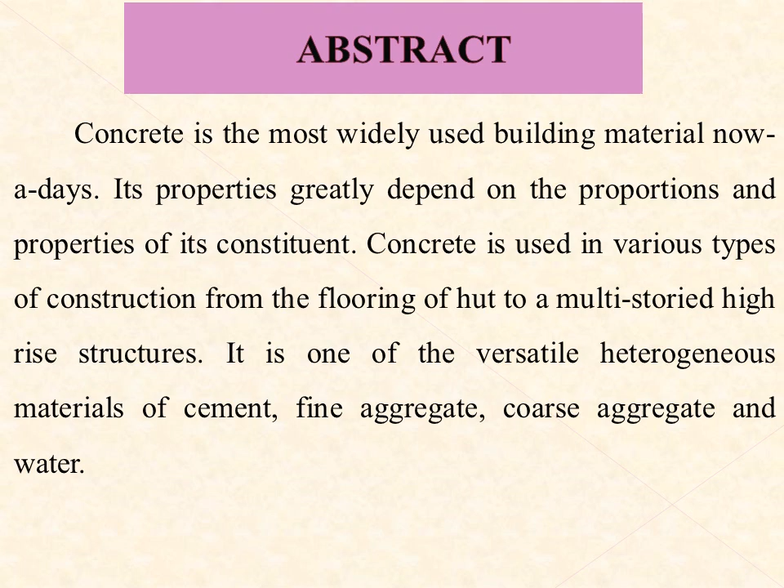Concrete is the most widely used building material nowadays. Its properties greatly depend on the proportions and properties of its constituents. Concrete is used in various types of construction, from the flooring of huts to multi-story high-rise structures. It is one of the versatile heterogeneous materials made of cement, fine aggregate, and coarse aggregate.

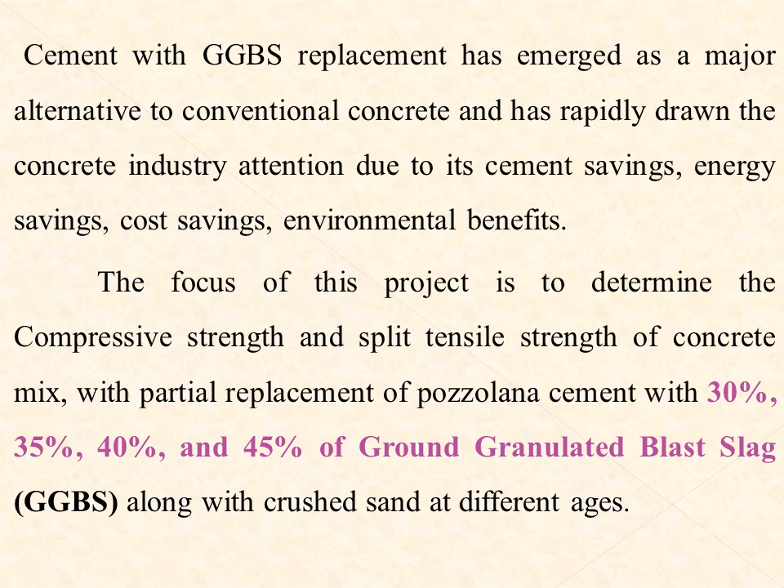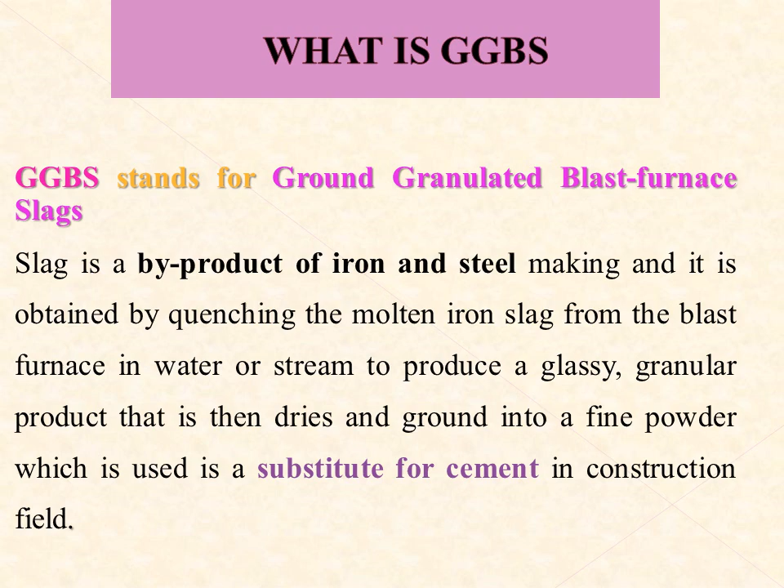The focus of the project is to determine the compressive strength and split tensile strength of concrete mix with partial replacement of cement with 30, 35, 40, 45% of GGBS along with crushed sand. GGBS is nothing but ground granulated blast furnace slag, a byproduct of iron and steel, used as a substitute for cement. The objective is to conduct property tests on coarse aggregate and fine aggregate, to carry out compressive and split tensile strength tests on various mixed proportions of concrete, and to compare the results of different mixed proportions.

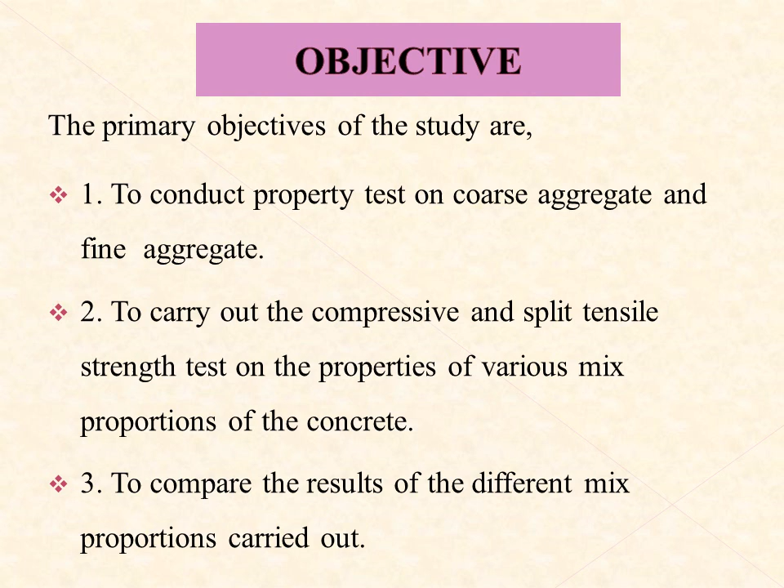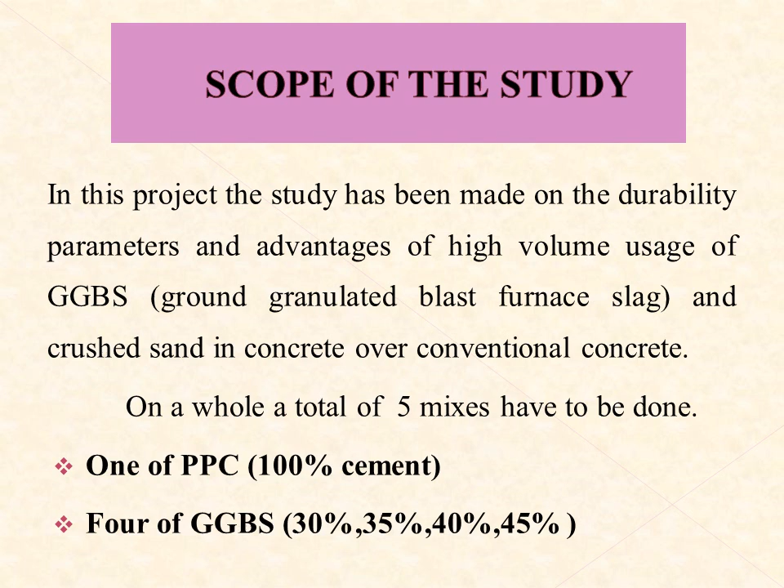The scope of the study has been made on the durability parameters and also the advantages of high volume mix of GGBS and its effect on concrete. As a whole, 5 mixes have been made: one of PPC 100% cement, and the other 4 of GGBS at 30, 35, 40, 45%.

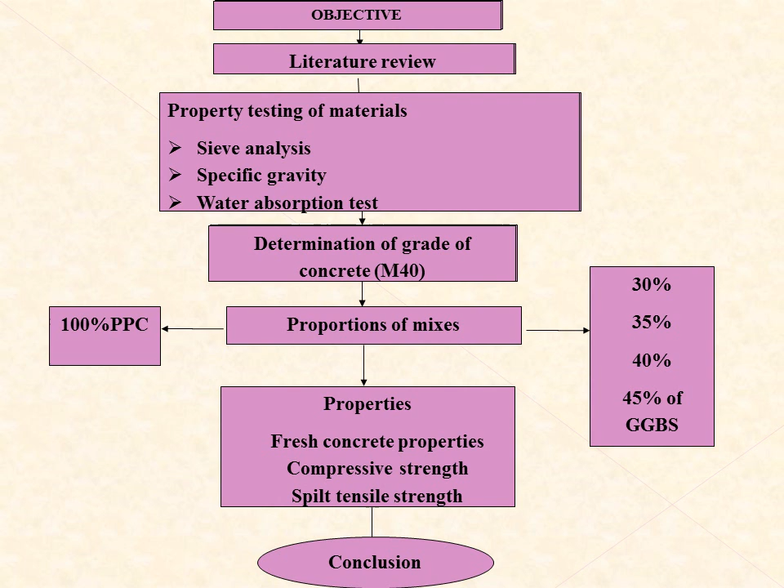Methodology: first objective, literature review, property testing, determination of grade. We determined the grade for M40 and proportions of mixes of 100% PPC, and 30, 35, 40, 45% GGBS, which underwent property testing, followed by conclusion and literature reviews.

The first paper was by Alvin Harrison. He observed that the addition of fly ash in PPC concrete causes slow hydration, and that phenomenon decreases the strength of the concrete mix at early age. Up to 30% fly ash shows a remarkable increase in strength compared to controlled concrete, whereas beyond that, the strength gets reduced.

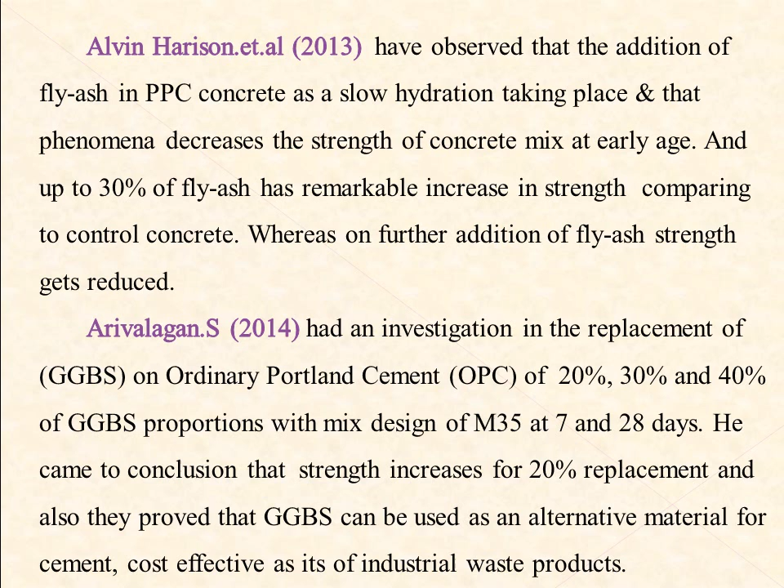Arivalagan's case study of 2014 investigated the replacement of ordinary cement with 20, 30, 40% GGBS proportions in mixes of M35 at 7 and 28 days. He concluded that strength increases for 20% replacement, and also proved that GGBS can be used as an alternative material for cement, being cost effective for the industry.

Pratap KV observed the triple blending of ordinary Portland cement concrete with fly ash and ground granulated blast furnace slag. Tests were carried out and showed improvement with the addition of fly ash and GGBS as a partial replacement to cement. The compressive strength and flexural strength of concrete increased by 11.13% and 11.74% respectively.

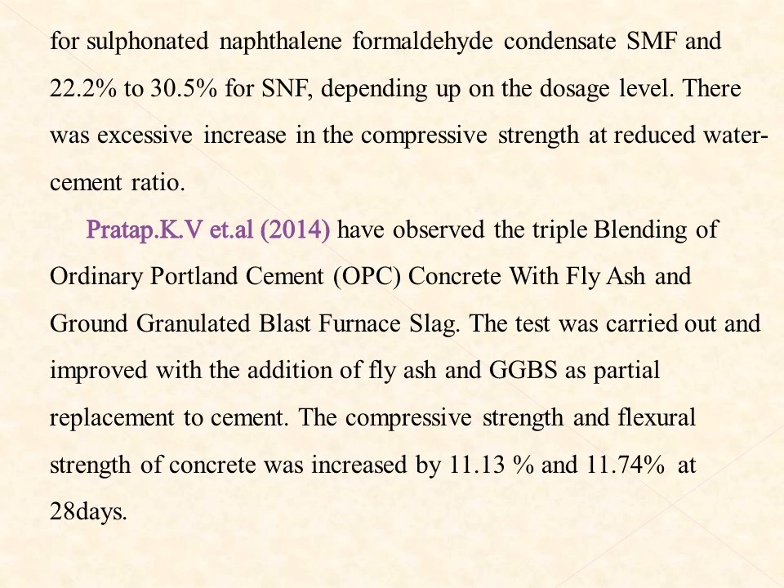Radhikesh concluded that the replacement of fine aggregate by crusher dust up to 50% by weight has a negligible effect on the reduction of physical and mechanical properties. He also concluded that 56% of money can be saved if sand is replaced by crusher dust.

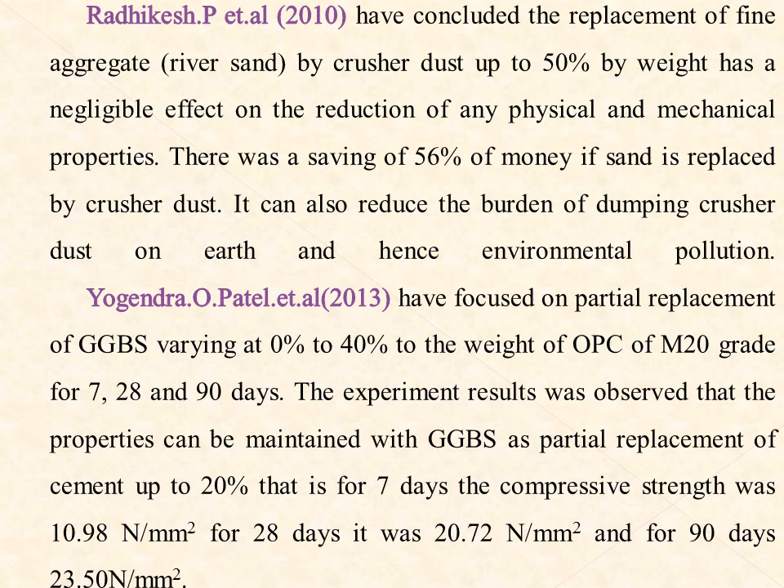Yogendra O. Patel focused on partial replacement of GGBS varying 0 to 40% of the weight of OPC, for M20 grade, tested at 7, 28 and 90 days.

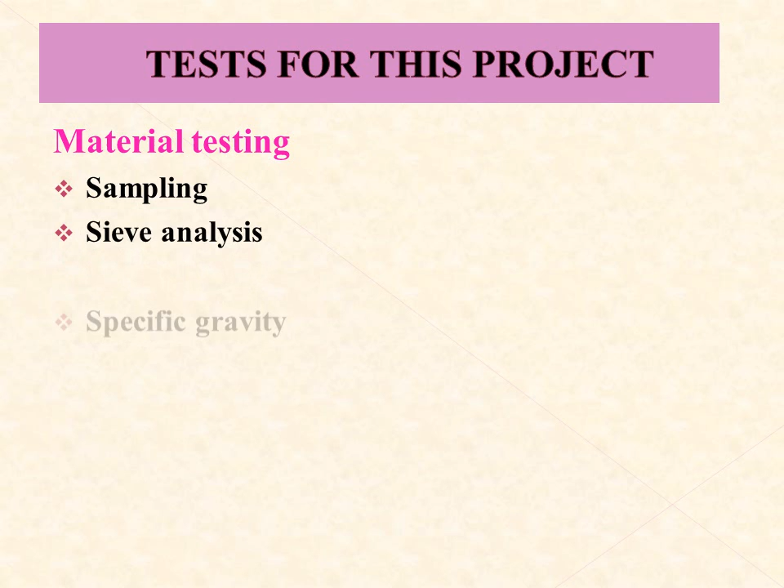The test for this project is first material testing. This undergoes sampling, sieve analysis, specific gravity, water absorption, and strength testing including compressive tests. Sieve analysis is the foremost test, a practice procedure to assess the particle size distribution.

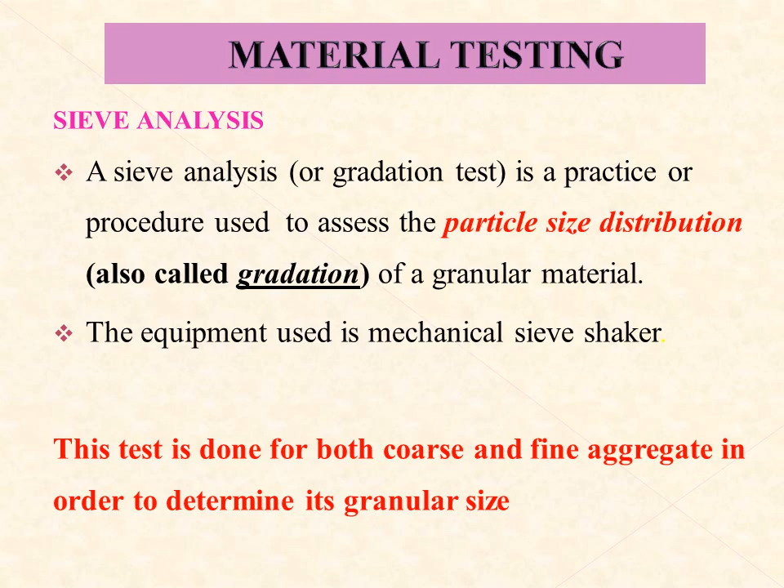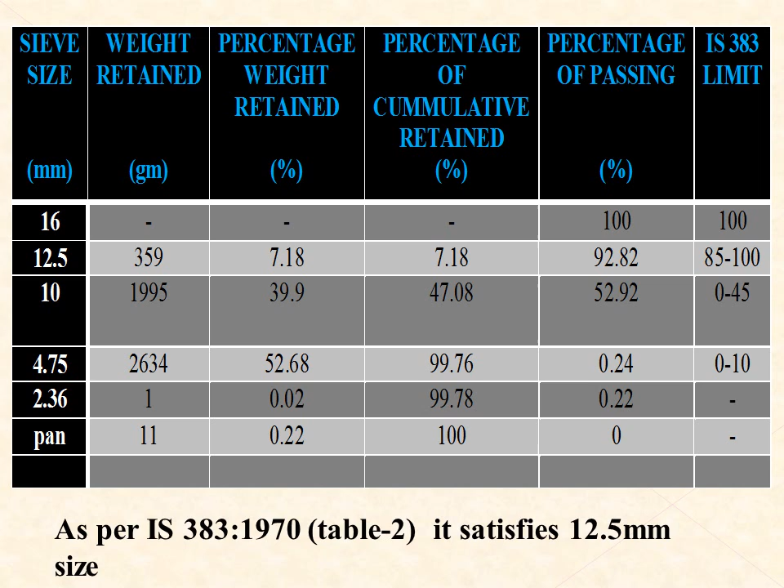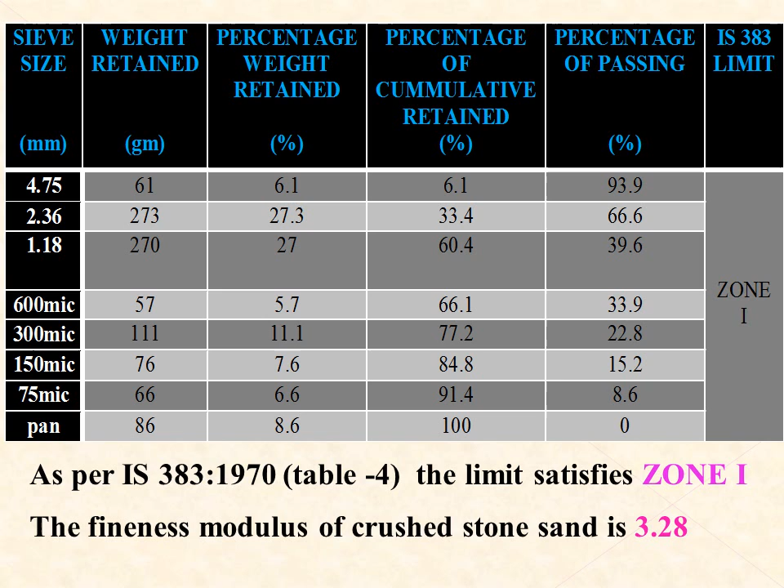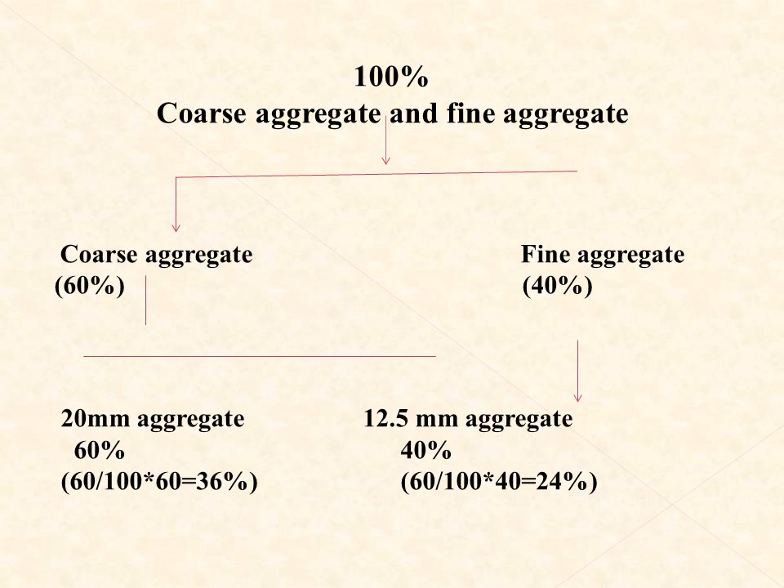For all-in aggregate: 100% of coarse and fine aggregate is further divided into coarse 60% and fine aggregate 40%. The coarse aggregate is further divided into 60% of 20 mm aggregate and 40% of 12.5 mm aggregate. As a whole, it satisfies all-in aggregate requirements according to IS 383 1970.

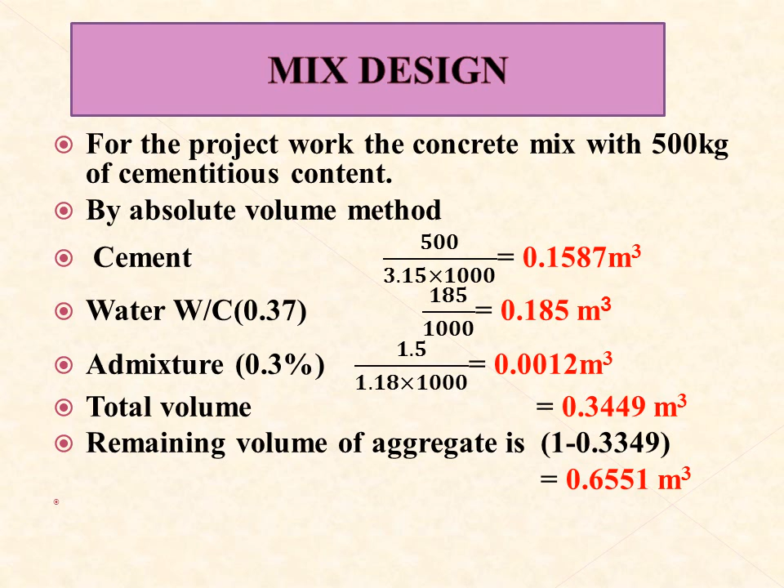For the mix design of the project, the concrete mix taken has 500 kg cementitious content. This 500 kg cementitious content was derived from M40 design, covering cement, water and admixture. We also obtained the weighted average specific gravity for 20 mm, 12.5 mm, and crushed sand, with total volume of aggregate as 1867.

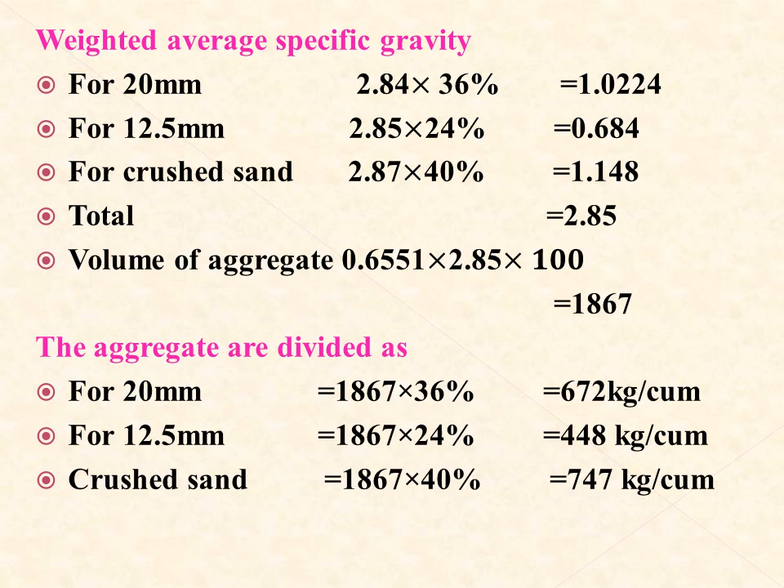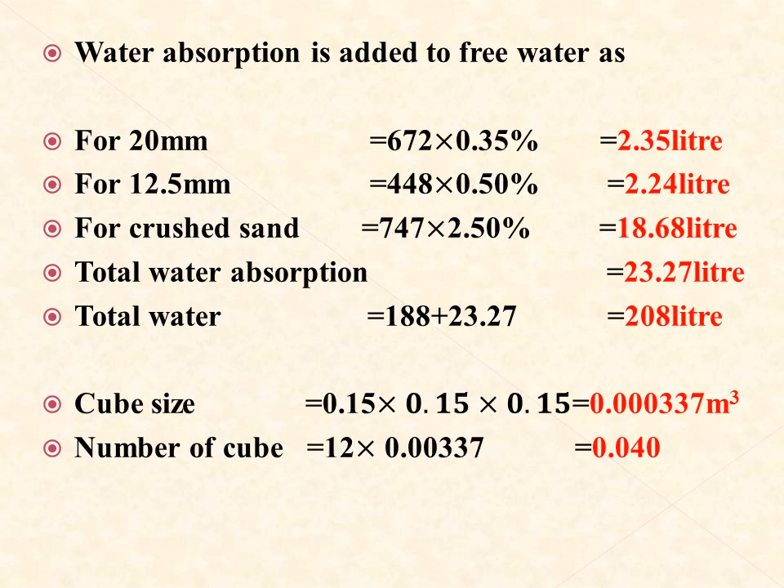The aggregates are divided as 20 mm, 12.5 mm and crushed sand, multiplied accordingly, with water absorption added to free water. For 20 mm it's 2.35, for 12.5 mm it's 2.24, for crushed sand it's 18.68. Total water absorption is 23.27, total water is 208, and the cube size is 15 x 15 x 15 centimeters. The number of cubes is 12, so the volume is 0.040 cubic meter.

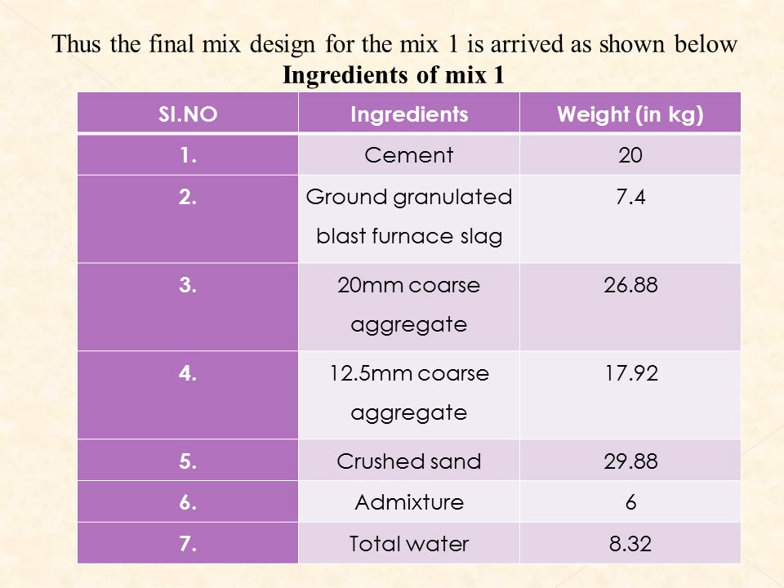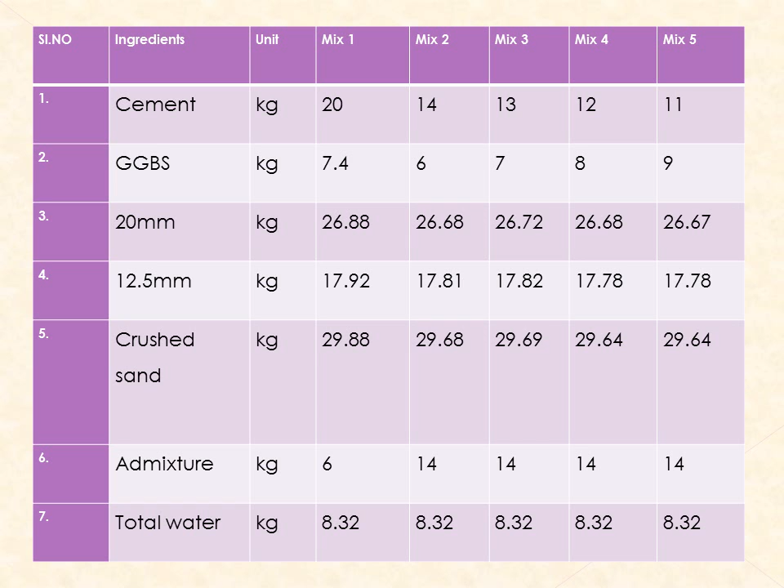This is the final mix for ingredient 1, that is for 100% PPC. This goes on to mix 1, mix 2, mix 3, mix 4, mix 5 based upon the proportions of 30, 35, 40, 45%. The test conducted was the compressive strength test, using a specimen of 15 x 15 x 15 centimeters.

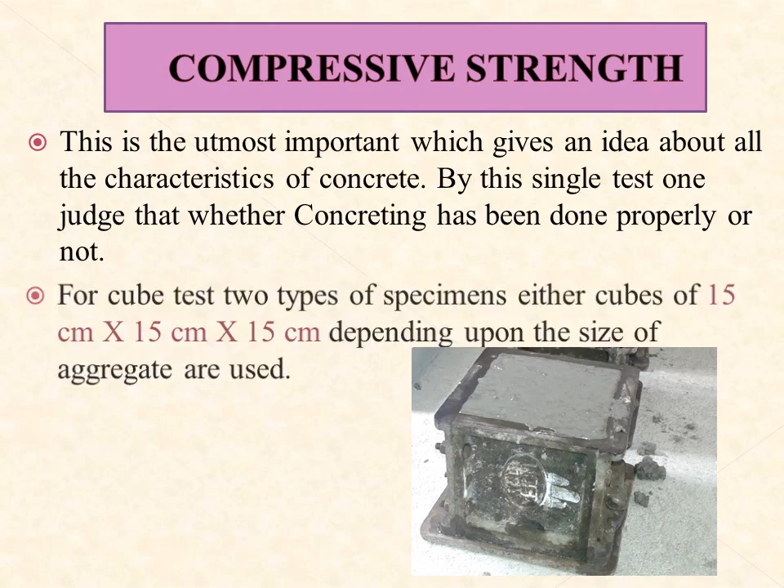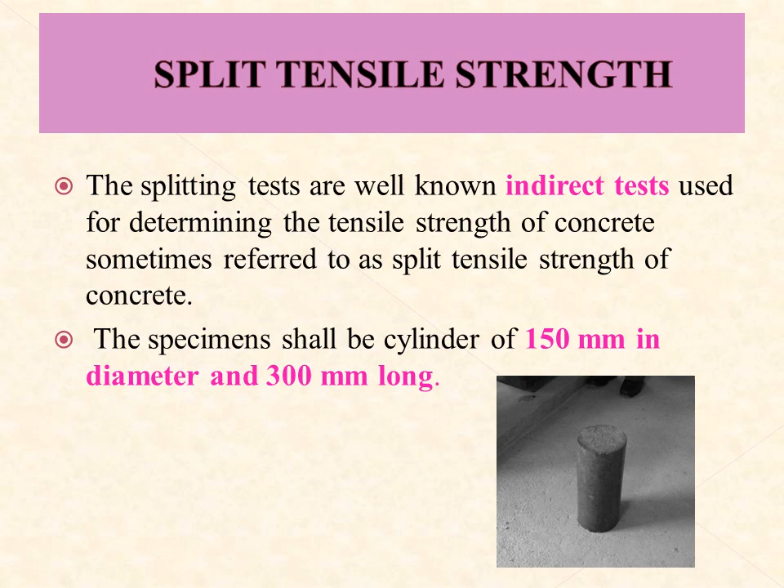The tensile strength test is an indirect test used to determine the tensile strength of concrete. The specimen used is a cylinder of 150 mm diameter. These are the photos taken during the experiments.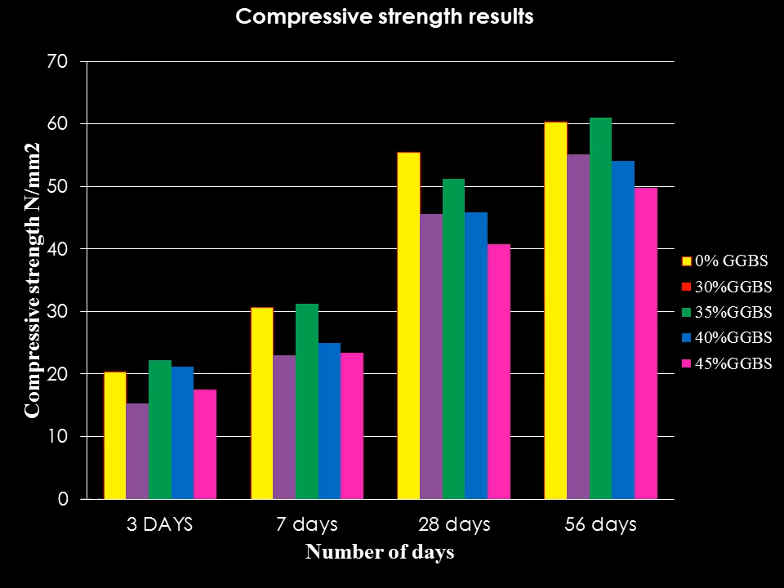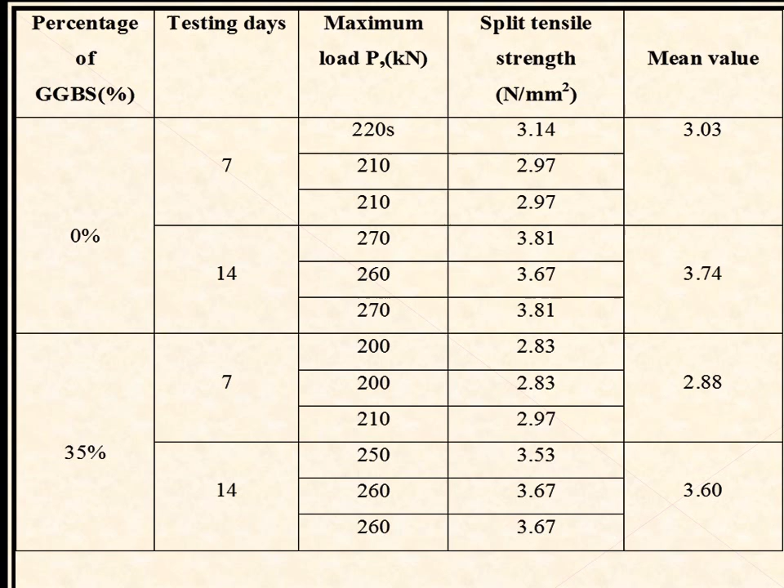For the strength test, the testing days were 7 and 14 days, and the mean value found was 3.03 N/mm², 3.74 N/mm². For the 35% optimum value, at 7 days it was 2.88 N/mm², and values were also recorded at 14 days.

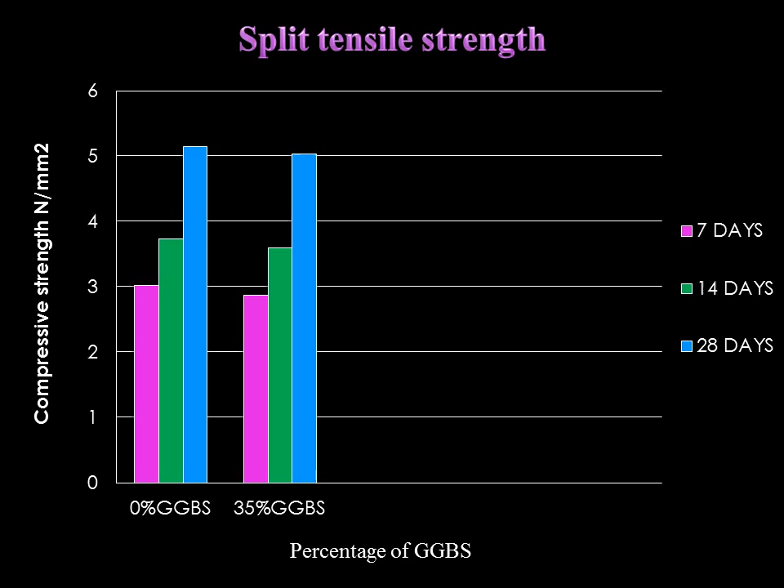The test was conducted for the 35% optimum range and shows values for 7, 14 and 28 days. The compressive strength of control concrete at 28 days reached a value of 55.5 N/mm², and at 56 days it was 60.44 N/mm². The 3-day testing results for proportions of 0, 30, 35, 40, 45% GGBS showed the maximum value at 35% was 22.2 N/mm².

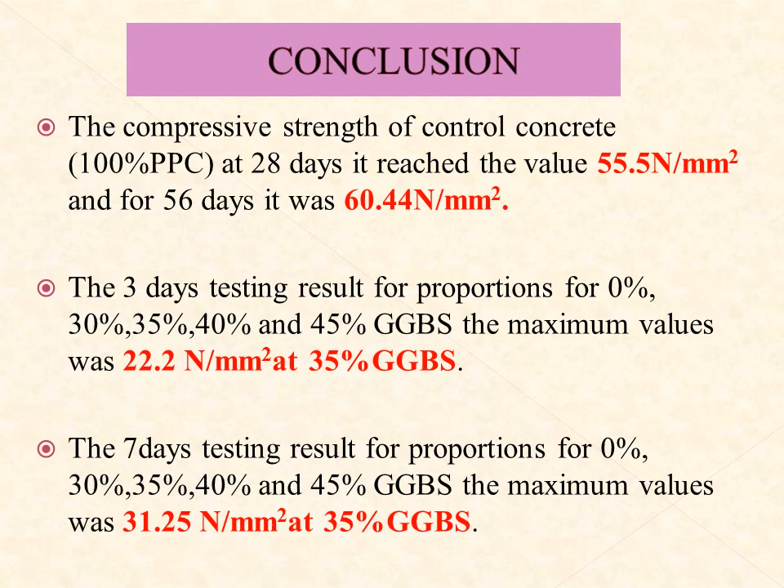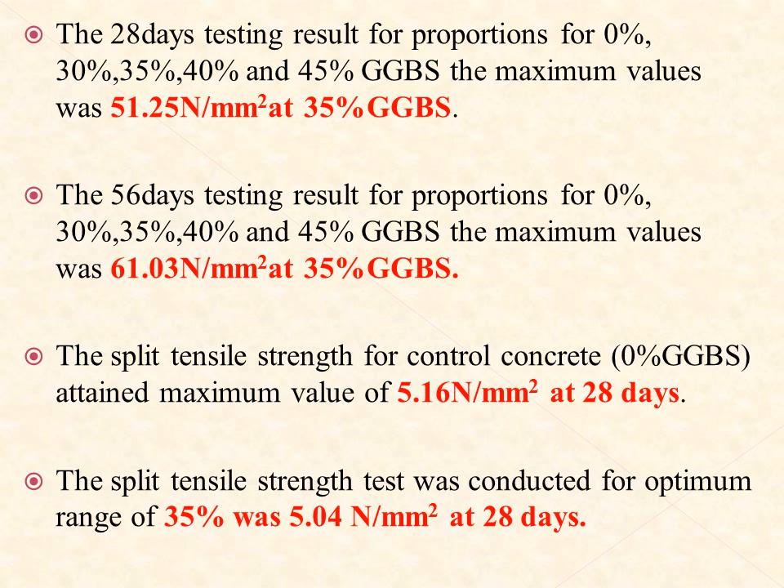The 7-day, 28-day, and 56-day tests followed, and split tensile strength for control concrete at 0% GGBS attained a maximum value of 5.16 N/mm² at 28 days. A split tensile strength test was also conducted for the optimum range of 35%, which was 5.04 N/mm².